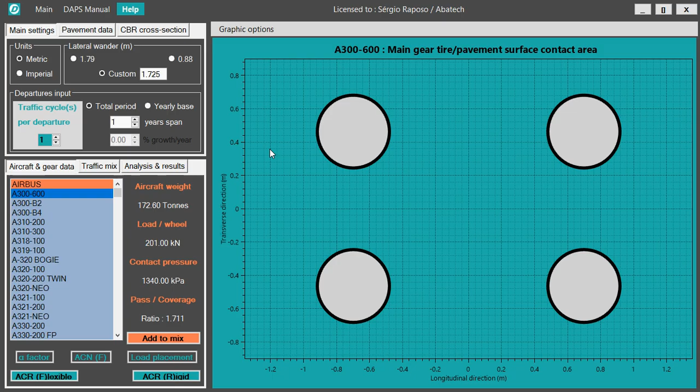In order to determine the PCR of an airport or airfield, we must start by defining the properties of the pavement structure for which we want to conduct the analysis, namely the number of pavement layers, the materials that were used to build the pavement and of which each layer consists, and also the mechanical properties of the layer. So in the particular case of the pavement that is being depicted in this particular area of DAPS, we have an asphalt concrete layer, a granular base layer, and a granular sub-base layer with these specific mechanical properties and these specific layer thicknesses.

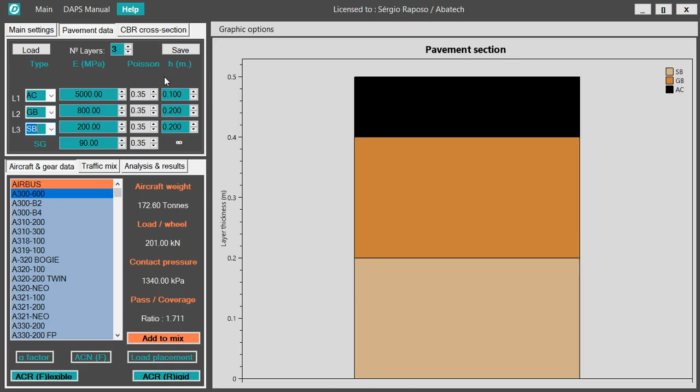Assuming that we have an expected traffic mix that is composed by this list of aircraft models and their associated number of expected departures from the airport, what we have to do next is define a number of analysis settings, such as the lateral wander, which is basically just another measure of the standard deviation, the number of traffic cycles per departure, which is a parameter that is associated with the layout of the airport or airfield itself.

And if we wish to conduct an analysis for a total period or based on the first year of a period. In this case, this expected traffic mix, the departures already correspond to the total period. But assuming that these departures would correspond to the first year, I would have to select this option here. Then I would have to define an expected growth per year, growth of the number of departures, and the span of the evaluation period. And DAPS, if I use this option, would automatically calculate by itself the total number of departures for the entire evaluation period.

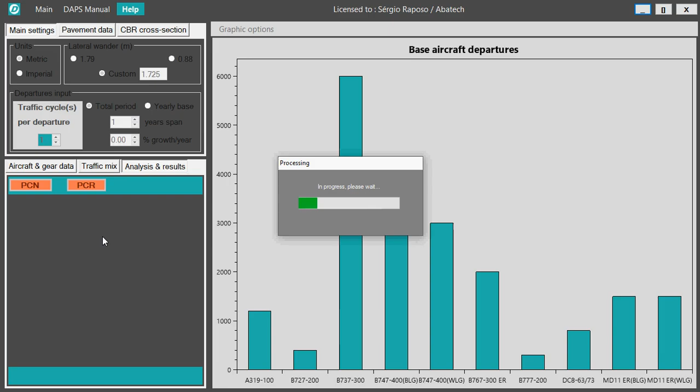So once I have the pavement data defined, the expected traffic mix defined, and the analysis settings defined as well, all I have to do is go to the Analysis and Results tab, select the PCR button, and after a few seconds, DAPS will provide us with the results for its analysis of the PCR for this particular pavement structure and expected traffic mix.

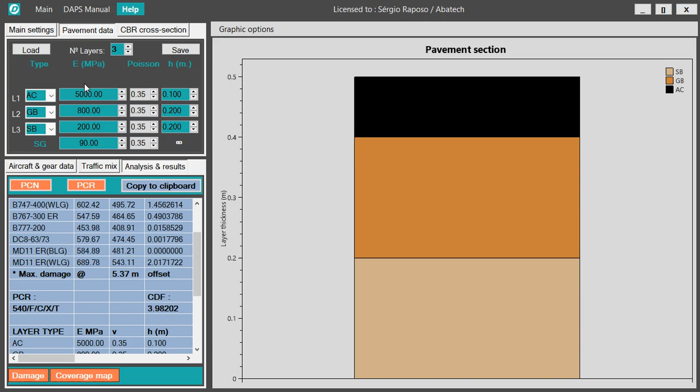What DAPS is telling us is that for these conditions, the PCR code is as follows. We have the numerical value 540. We have an F for flexible pavement, because the pavement that we are considering consists of a flexible pavement. So F is for flexible. C corresponds to the subgrade category, and is determined by the subgrade modulus. So to a modulus of 90 megapascal corresponds a C subgrade category. Then we have X, which is the code for the inflation pressure, and T because it's a technical evaluation.

DAPS is also telling us that the maximum damage to the pavement structure occurs at an offset of 5.37 meters in regard to the center line of the runway or taxiway, for example, and that the cumulative damage factor, CDF, corresponds to a magnitude of 3.98, which is the same thing as to say 398%.

So this particular pavement structure is either under designed for the expected traffic mix, or the traffic mix demands too much of the existing pavement structure, and we are going to have to condition the aircraft that use this particular pavement structure in order to keep the structure with a controlled damage level. And it's clear to see that the damage caused to the pavement is higher than 100%,

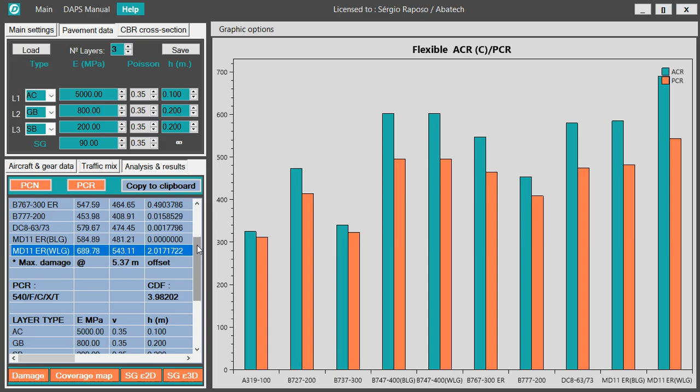If we wish to visualize the evolution of the damage in the pavement section in regard to the distance to the center line, we can select the damage option, and DAPS automatically presents us with this particular graphic, in which we have in the vertical axis the damage calculated in terms of percentage, and in the horizontal axis we have distance to the center line in meters.

So we can see that each of these distinct lines that are being represented in this graphic correspond to the individual damage caused by each specific aircraft model. And then we have this black interrupted line that corresponds to the sum of all the damages caused by the different aircraft. So this black interrupted line is the total damage.

And we can see that the total damage has a peak of approximately 400%, which corresponds to this number here, 398%, and that the peak damage occurs at a distance which is a bit shy of 5.5 meters, and if we want to define it numerically, more specifically, corresponds to 5.37 meters. So this information here that we can see numerically, graphically corresponds to this point here. So you have a distance of 5.37 meters and a maximum damage of almost 400%.

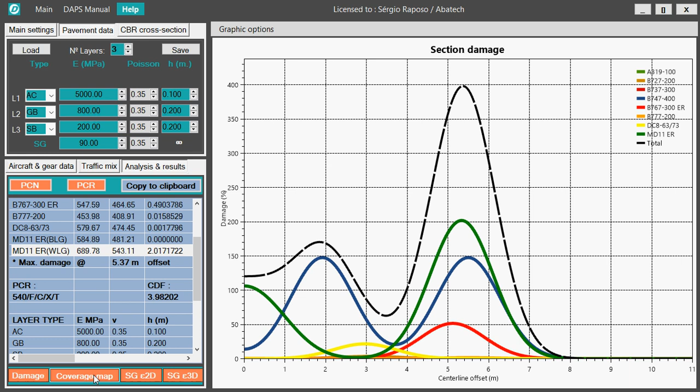If we wish to visualize the coverage map that corresponds to this traffic mix, we can also use this particular option here that says coverage map, and we will be presented with a similar graphic as before, but now instead of damages we see the number of coverages that each aircraft will have on each section of the pavement as a function of the distance to the center line. And we can also see that the aircraft model that will have a higher number of coverages will be the B737, which is represented with this dark red line here.

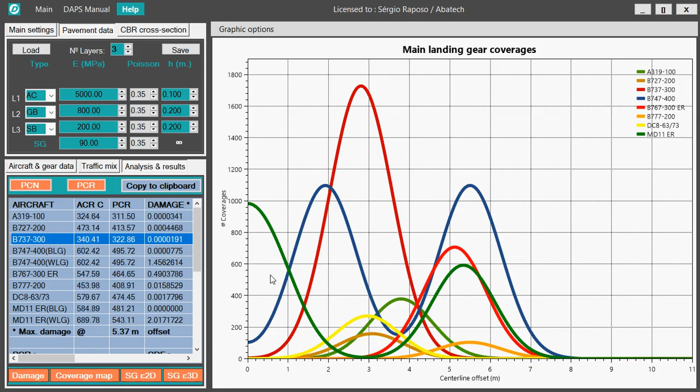And although this is the aircraft model that has the higher number of coverages in this pavement section, it's by far not the model that is more demanding of the pavement structure, and this happens because if we visualize a 3D representation of the vertical strains on the top face of the subgrade for the B737, we can see that the maximum magnitude of the subgrade strain is approximately 1200 microstrain, and we can also see that the main landing gear is composed of two wheels, but these wheels are disposed transversely, so they are side by side. So each time that a wheel passes, the peak value of approximately 1200 microstrains will only be achieved once.

While for the airplane MD-11, if we visualize the exact same graphic that corresponds to a representation of the vertical strains on the top face of the subgrade, we can see that the maximum strain this time is above 1800 microstrains, and that due to the arrangement of the main landing gear, the peak value is achieved twice. So every time that the main landing gear passes over a specific pavement section, the maximum peak strain on the subgrade will be achieved twice.

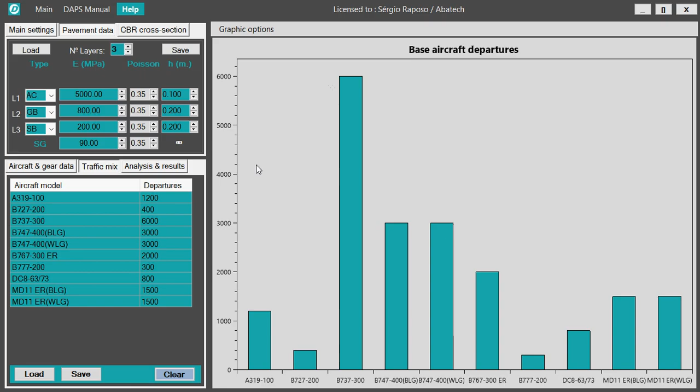So it's the combination of the number of coverages that a particular aircraft model has on a pavement section, and the effects that its load causes on the pavement structure, namely the strains, in this case for PCR, only the strains on the top face of the subgrade, that factor in to cause the total damage. So we cannot purely simply assume that just because this particular aircraft, in this case the B737, has a much higher number of departures than the MD-11 and all others, that this will be the most damaging aircraft. So we have to be careful in regards to that.

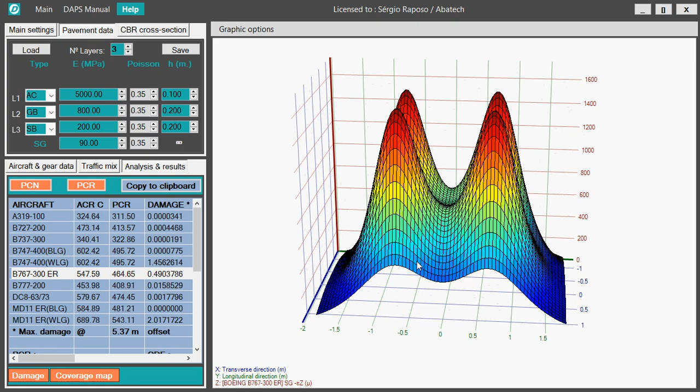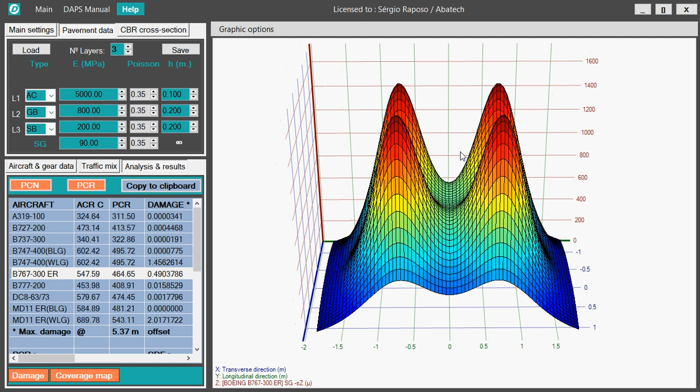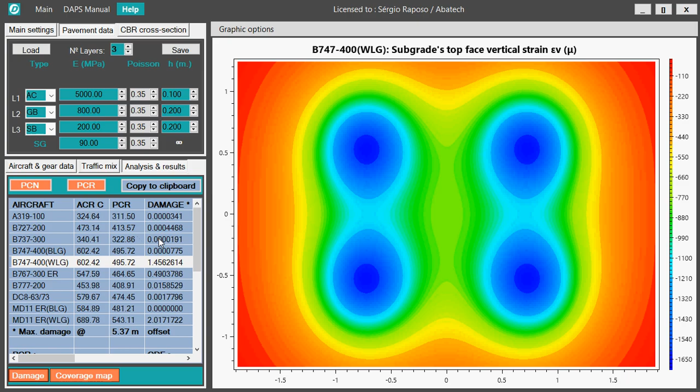We can visualize the subgrade strains for any aircraft that we have in the list. For example, for the B767, either in 3D representations or as well 2D representations, which will provide us with exactly the same graphic, but just in a slightly different format. We can easily copy this graphic to Excel, to Word, to any other software that we would like to use, and we can also copy the summary table that has all the information that we require. Using this copy to clipboard button, we can copy the entire summary table to Excel, Word, or any other software.